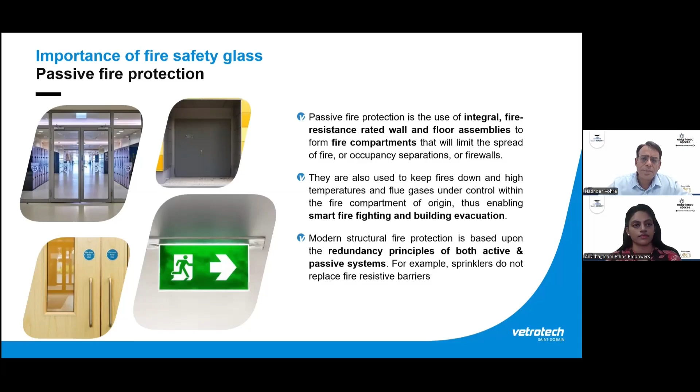When we talk about fire protection using glass as a medium, yes, fire rated glasses are of different types. Certain glasses withstand fire and don't break when exposed to extreme heat during a building fire, but they allow heat transfer. Then there are certain types of glasses which don't break in case of fire and also limit the heat. Further, there's one more category of fire rated products which really limit the heat and give complete insulation, as if it is a brick wall.

With technology and advancements, a lot of products are being developed, and a lot of innovation and R&D is going into place, which will really help in future for architects or designers to use such products in their buildings and provide an easy egress to the occupants.

More importantly, when we use fire rated glazed solutions, which have glass in them, glass gives you transparency and visual benefits. It can be combined with any multifunctionality, and suppose we are able to see the fire and detect it, then definitely we can cut down that fire in the initial stage.

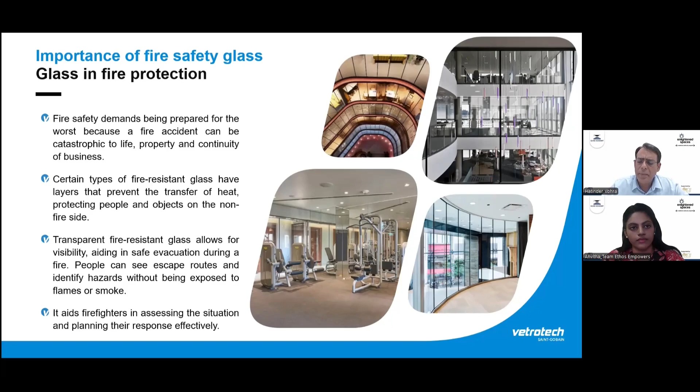More importantly, these fire rated glass solutions really help or aid the firefighters, because these are the people who actually enter the building when the fire is at a very advanced stage. So for them it is important to understand where the fire is, where the seat of the fire is, and such products will also help them to reach the seat of the fire.

So before we go into fire rated glass, I would just take you a few minutes to make you understand how glass is made.

Glass has a couple of components, the major component being silica sand, which forms 60% composition of that glass raw material. Then we have soda ash, dolomite, calcite, and cullet. Cullets are nothing but broken glass pieces which are again used while manufacturing glasses. Why is cullet used? Because these cullets really help to melt the whole batch of raw material faster. That is why these cullets are used as part of that particular batch.

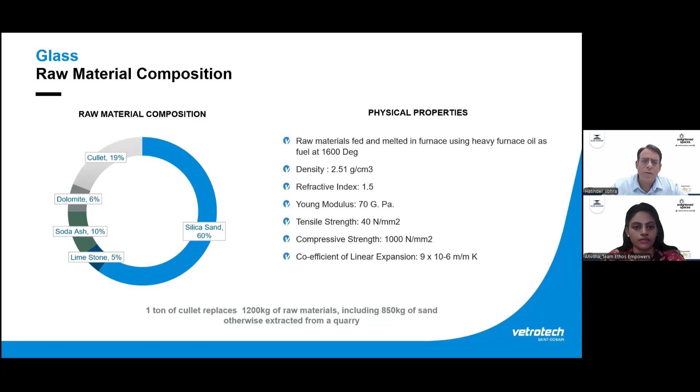Then it goes to QC, where automatic laser detection is there, and cutting will happen. Then packing and transportation will happen. So this is the basic model of how glass is made.

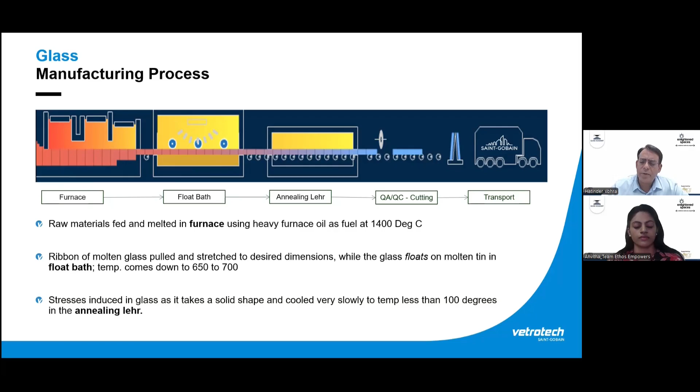Now, when it comes to fire rated glass, yes, for certain fire rated glasses the raw material composition is slightly different. We will sometimes add alkaline earth metals so that we increase the melting point of the glass. In the float bath, the temperature of the glass will normally go up to 600 to 650 to 700 degrees Celsius, whereas when we add alkaline earth metals, or it could be a borosilicate glass, it can go up to a higher temperature, even 900 plus degrees Celsius. So this is how the different types of fire rated glasses are made.

Coming to the performance of glasses under fire, this is a very important slide, because we need to know which type of glass will perform in case of fire. When it comes to annealed glass, the normal float glass which we call annealed glass, it will break if exposed to fire within less than a minute. So it is not a fire rated glass.

Wired glass, though it was where fire rated glass itself started, I would say it started with wired glass, but eventually these wired glasses have been phased out due to their drawbacks, and people getting hurt due to the wire mesh. But these can take a temperature up to 30 to 60 minutes only, and that too in very limited size, not larger panes, when it comes to fire rating.

The third category is tempered glass, which is glass that is heated again once it is made, and then made stronger. These tempered glasses, when exposed to fire, will also break within less than 5 minutes, 4 to 5 minutes. They will immediately break. Then there is laminated glass, which is glass laminated with polyvinyl butyral, called PVB layers.

And then PVB being a combustible material, this will actually further add on to fire, and these glasses also break very fast. When it comes to double glazing, normal double glazing, I'm talking about ordinary double glazing with ordinary glasses, not fire rated glasses, this will also break within less than 5 minutes.

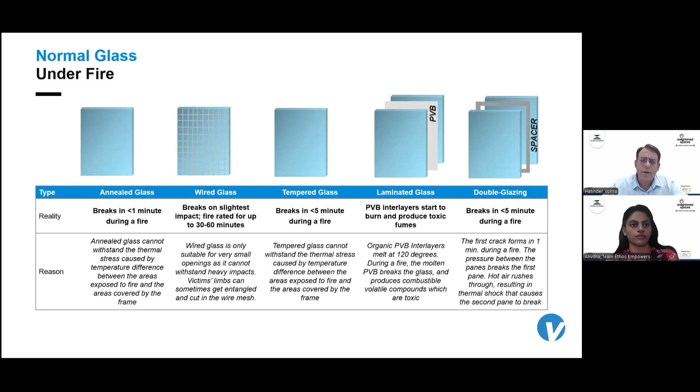So why do these breakages happen in all these glasses? This is because due to delta T, the temperature differential, the basic structure of these glasses is such that they are not able to withstand that heat, and they break. Unlike the fire rated glasses, which can attain higher temperatures and don't break till the time frame it is being tested. Let's say it is tested for 1 hour or 2 hours, it will withstand fire or that heat for that duration.

So when coming to the category of fire rated glasses, I'll cover the classification in coming slides. The monolithic glass, as I discussed, will not break, but it will definitely transfer heat. It will withstand that fire for 30, 60 or 120 minutes, but it will transfer the heat immediately to the other side, because when there is a fire in a building, the temperature will go up to 600 degrees Celsius within 10 minutes. So on the fire side, if we have 600 degrees Celsius, the non-fire side will eventually go to 400 plus, 500 plus within a very short period of time, again within less than 10 minutes. That means I cannot cross that area, because I will die if that side is even more than 100 degrees Celsius.

Then comes the other category of glass, the intumescent interlayered category. In this, you have two glasses with a gel in between, which could be a patented compound for different companies. What happens to this interlayered gel? The interlayer is basically a compound which will foam up in case it is exposed to fire. Any side could be the fire side - these are bidirectional glasses.

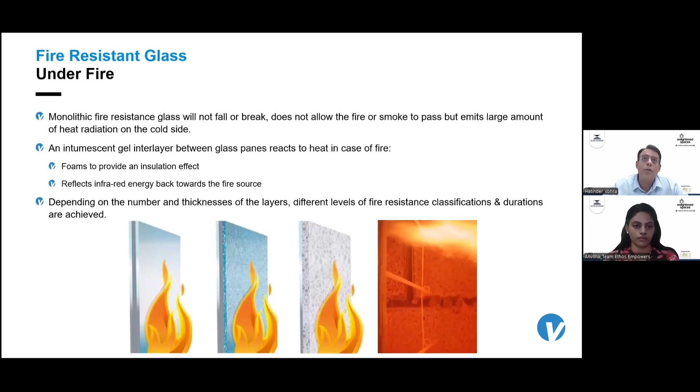That means if there is a fire in a building, and let's say it takes 10-15 minutes to evacuate that building, at least for the initial time frame, depending on which category of product we are using, the heat will not transfer, and I can easily cross to the non-fire side without feeling any heat - the other side could be even 1000 degrees Celsius.

So I'll just run a short video to give you a brief idea of how we test these glasses.

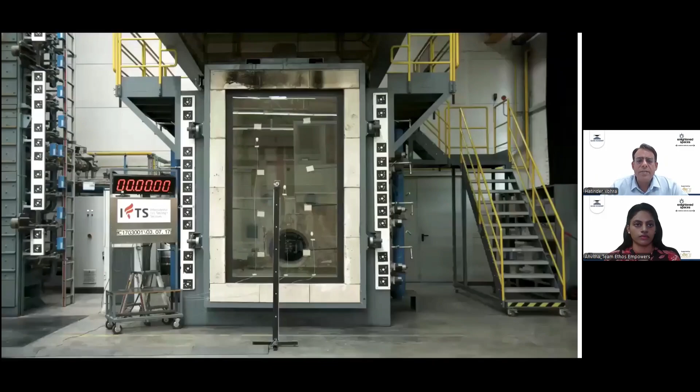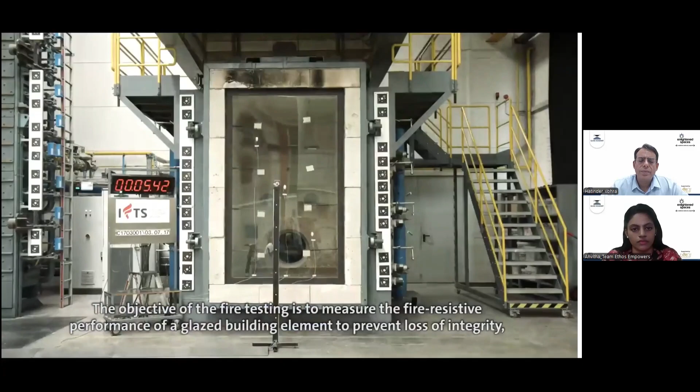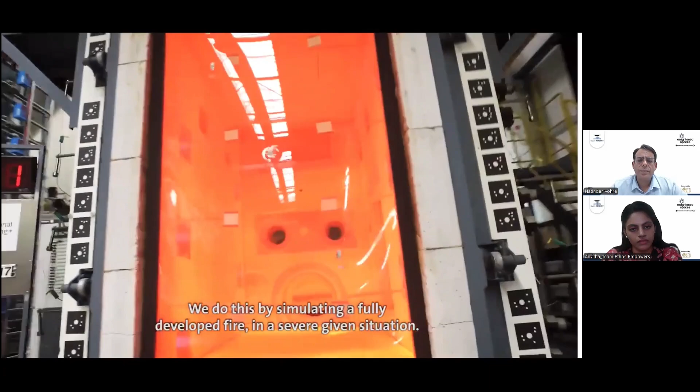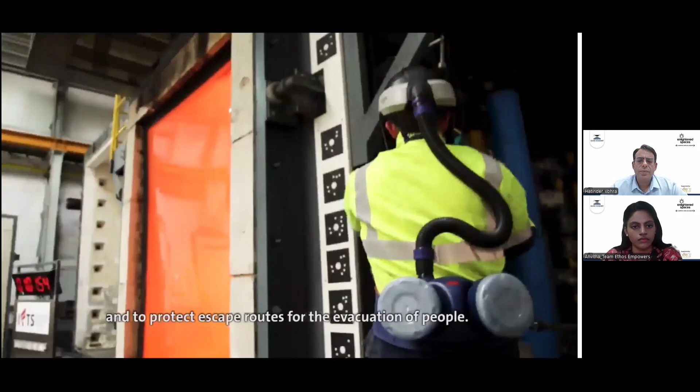Welcome to the world of fire testing. In this short clip, we would like to introduce you to fire resistance testing of glazed building elements. The objective of the fire testing is to measure the fire resistive performance of a glazed building element to prevent loss of integrity, to limit heat transmission or temperature rise, which might cause the spread of fire. We do this by simulating a fully developed fire in a severe given situation. These fire-resistant elements are mainly used for fire compartmentation, limiting the spread of fire to other rooms and to protect escape routes for the evacuation of people.

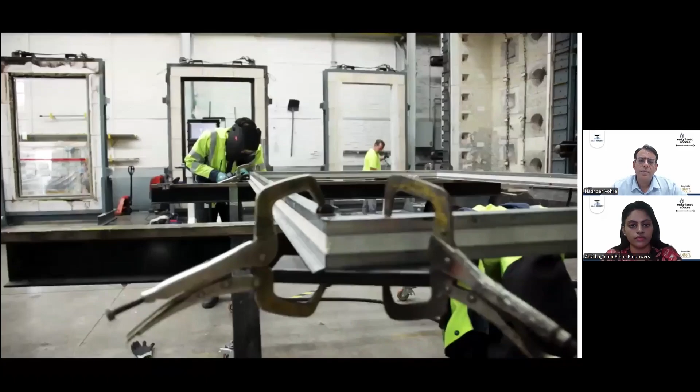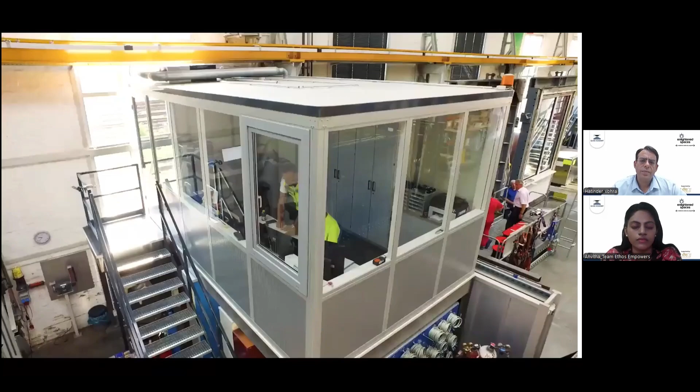In the test, the furnace simulates a room fire after flashover, when air temperature rapidly rises. The flashover point is the moment of near simultaneous ignition of most of the directly exposed combustible materials. The fire-resistant glazed building element is installed in front of the furnace. During the test, measurements are taken and observations are made on the opposite side of the fire. Fire resistance tests are conducted according to standardized test methods that outline in detail how the test must be conducted and which criteria need to be fulfilled.

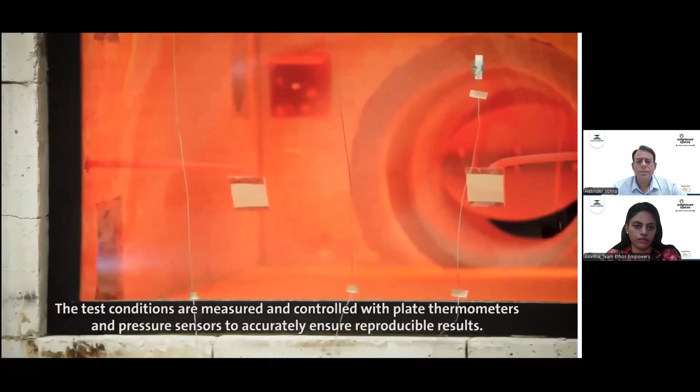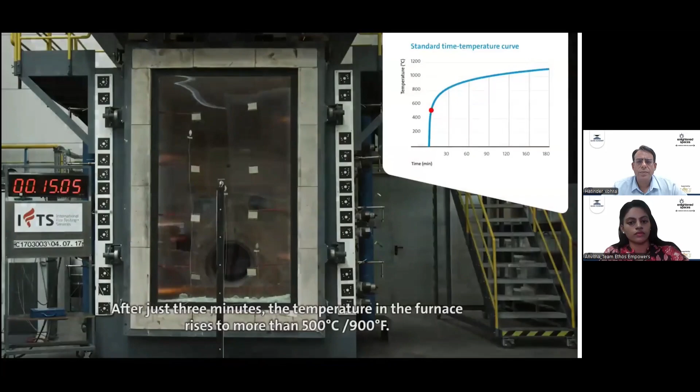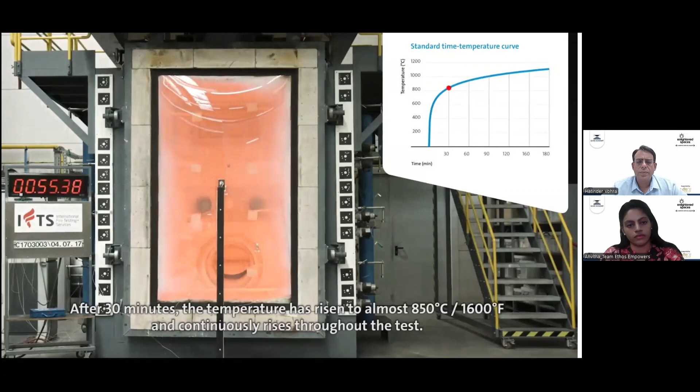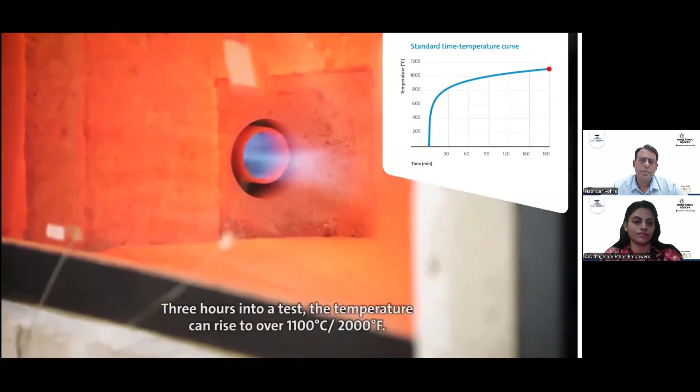Most of these test standards follow the standard time temperature curve according to ISO 834. The test conditions are measured and controlled with plate thermometers and pressure sensors to accurately ensure reproducible results. After just 3 minutes, the temperature in the furnace rises to more than 500 degrees Celsius, which is 900 degrees Fahrenheit. After 30 minutes, the temperature has risen to almost 850 degrees Celsius, which is 1,600 degrees Fahrenheit, and continuously rises throughout the test. 3 hours into a test, the temperature can rise to over 1,100 degrees Celsius, which is 2,000 degrees Fahrenheit.

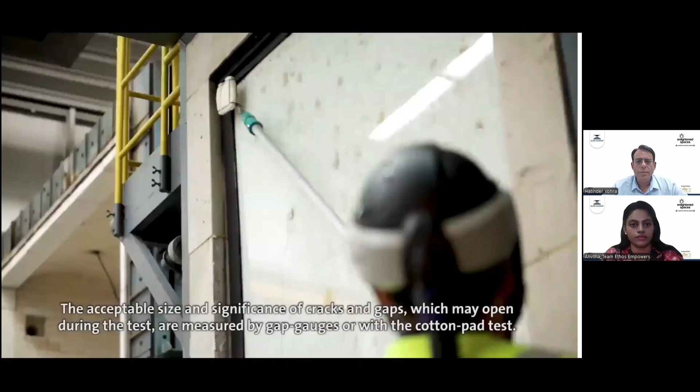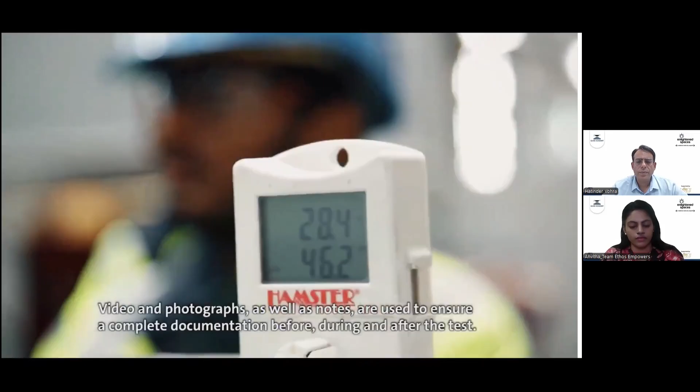On the opposite side of the fire, temperatures are measured with thermocouples placed on glass and framing surfaces. The radiated heat of the tested element is measured with a radiometer. The acceptable size and significance of cracks and gaps which may open during the test are measured by gap gauges or with the cotton pad test. Video and photographs as well as notes are used to ensure complete documentation before, during and after the test. After the building element has proven its performance over the intended time, the test is stopped in a safe and controlled manner.

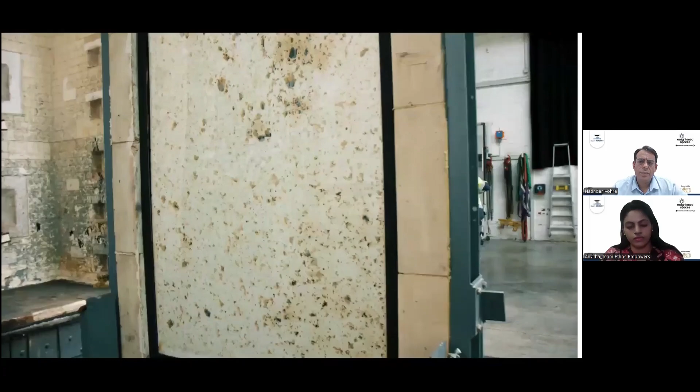Once the element has cooled down, it can be further analyzed. Building elements that successfully pass the test and for which a report is issued are eligible for classification according to the relevant building regulation or local requirements.

So as you can see, these testings are very important, and more important are the labs where we do the testing, because all these labs should be accredited labs. That means they are fully calibrated, they are certified, and from there we get the certification, which is called a third-party certification, and only based on these certifications we are able to offer the solutions to the customers.

So coming to fire safety types, this is important, which we discussed initially. The first type is called integrity type. It is denoted by E, and it means that the particular glass or a particular material will remain stable in fire. It will not fall, it will not break for that much time frame, could be 30, 60, 120 minutes, but heat will transfer.

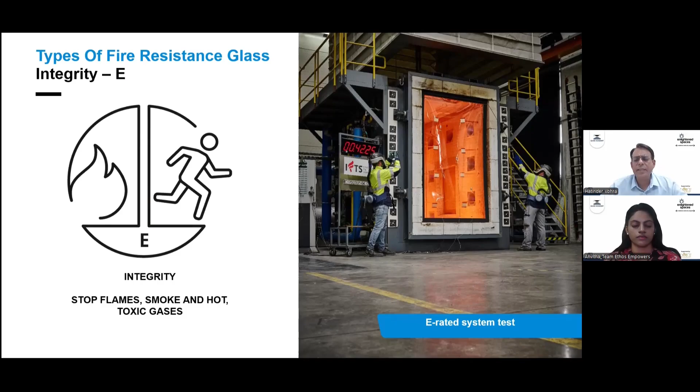So this is the basic category of fire rated glasses, and generally we recommend these glasses only where we see in the design of a building that there is an area where people are not going to egress, because if heat transfers, then it limits the egress of the occupants. So it has a restricted usage in a building.

Coming to the EW category of products, this is the most widely used category in India, in Europe, in the Middle East, or even in Southeast Asia. Why is this category important? Because this category is a midway category between E and EI. The EW category limits the radiation as per the standard to 15 kilowatts, but of course 15 kilowatts is a very high value.

But what happens is that initially, for 20 or 30 minutes, the radiation is even less than 1 kilowatt. And even for approximately 45 minutes, radiation is close to 1.2 kilowatts. That means I can stand very close to the specimen, while the other side could be even 1100 degrees Celsius, without feeling heat. So in case of fire, I can easily cross that area if I'm evacuating a building. That is why this EW category is very important, because it provides easy egress to the occupants. It limits the radiation and provides insulation also for a particular time frame.

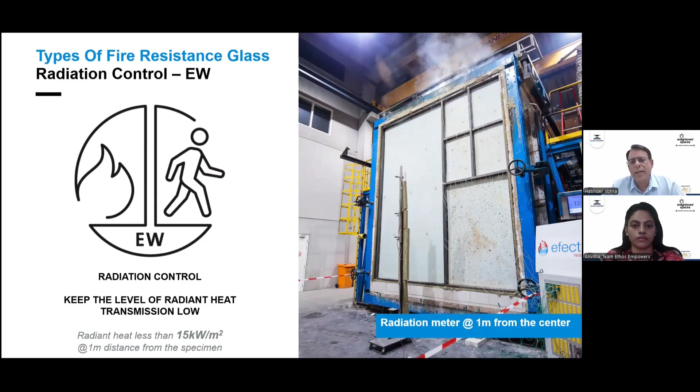And these radiations are measured. As you can see, there is a radiation meter at the center of the specimen. This is kept at 1 meter distance only. It is not kept at more than 1 meter because the heat dissipation is very high. So that is why it is kept at a distance of 1 meter as per the standard.

Then coming to the third category, which is technically one of the best categories, called the EI category. This means integrity with insulation. Integrity with insulation means that you have thermocouples on the non-fire side, and the maximum temperature on the thermocouple should not be more than 180 degrees Celsius.

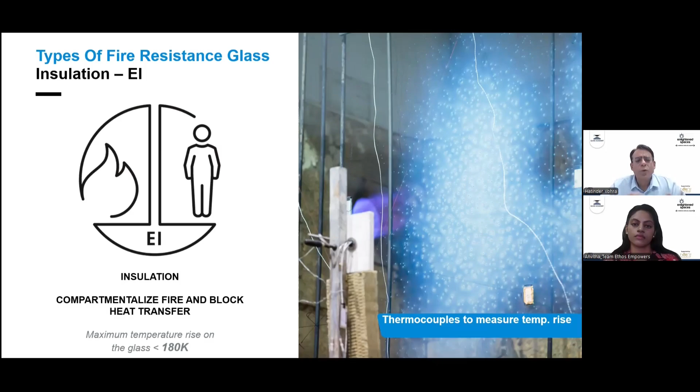So when we say it should not be more than 180 degrees Celsius, it means that the heat is much less than 1 kilowatt. The other side could be 1000 plus degrees Celsius, but I will not feel any heat on the non-fire side. So it is as good as a transparent wall. This EI category could be EI 30, EI 60 or EI 120.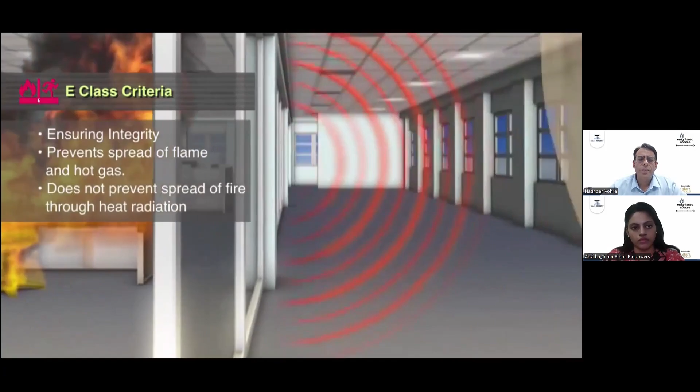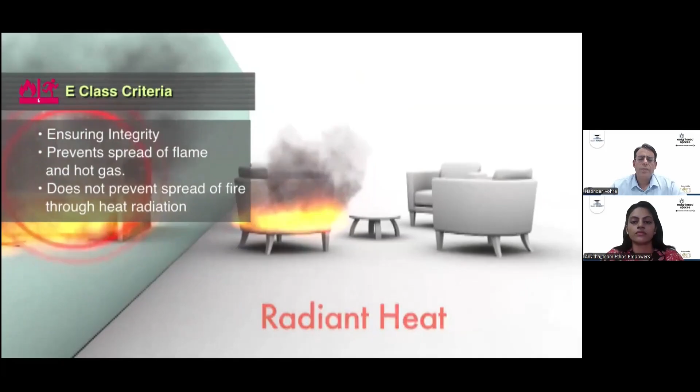When it comes to fire safety, there is no second chance. This video will showcase the comparison between two kinds of fire-resistant safety glass through a live demo. Integrity E-rated glass stops the fire and remains intact for the time frame of its fire resistance period. The intense heat transmitted to the non-fire side may result in spontaneous combustion of objects, and it could impede the safe passage of the occupants.

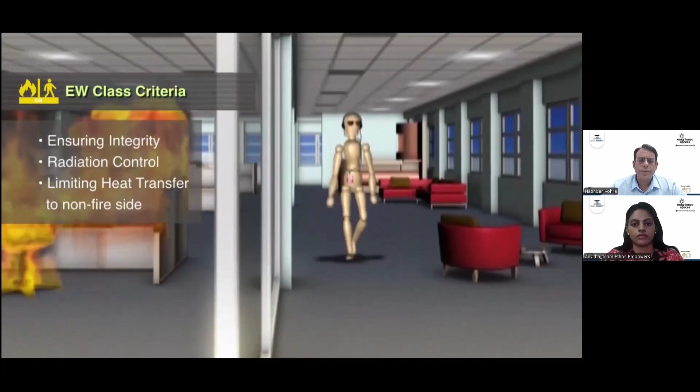EW rated glass keeps its integrity during the event of fire and also controls radiant heat transfer to the non-fire side during its resistance period. The benefit of using an EW rated glass will be demonstrated through a simple experiment at the World Glass Complex of Saint-Gobain at Sriperumbudur, Chennai.

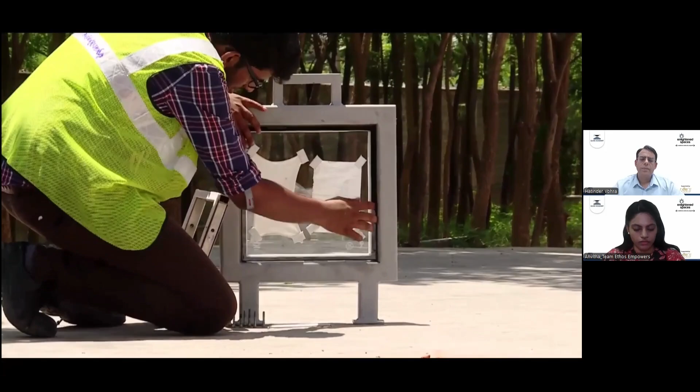On the left is a highly toughened monolithic integrity E-rated glass. On the right is an EW rated glass including an intumescent interlayer between two toughened glass panes. A piece of cloth and paper are stuck on both the glass panes fitted into a frame. They simulate objects on the non-fire side in the event of a fire. What do you think will happen to them?

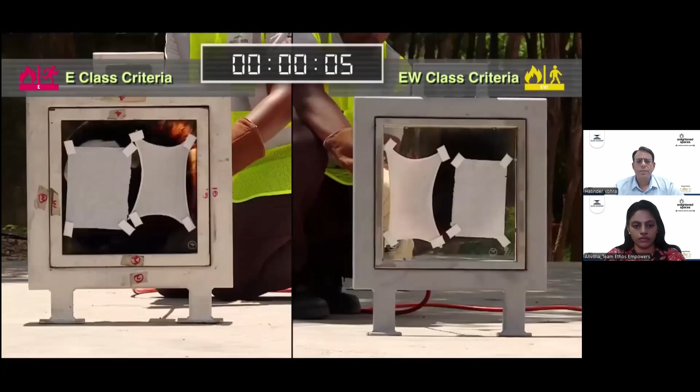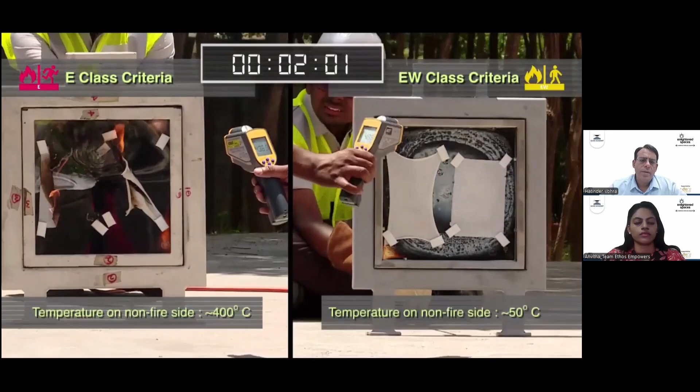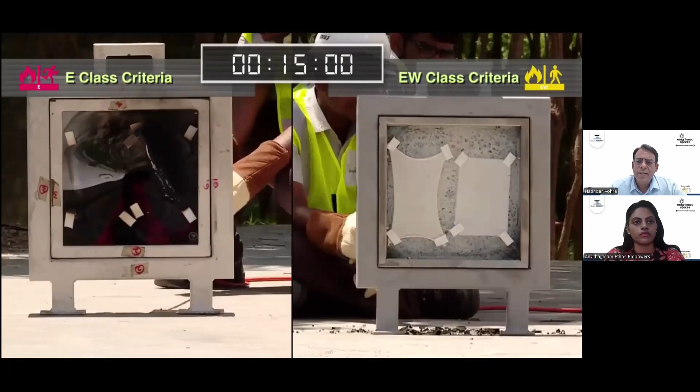On the left side, the paper has burnt due to heat transfer. Whereas on the EW side, it is intact, and we can even touch that side immediately. The other side is still...

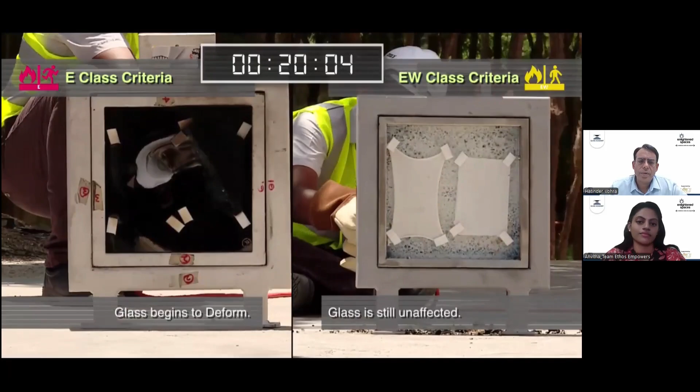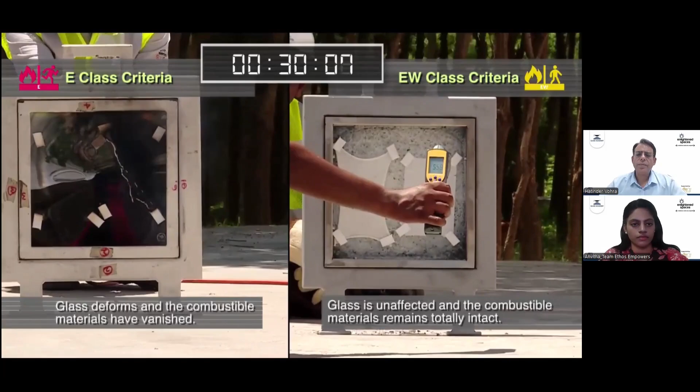The items stuck on EW rated glass remain totally intact, whereas the combustible materials on the E-rated glass have vanished completely. Knowing the right choice of glass is the first step towards safety. Choose wisely.

So now coming to the applications with respect to the National Building Code. What our National Building Code says, as on date, is that the fire exits and the doors in the building should have integrity, stability, and insulation for 20 minutes. That means with this criteria of insulation for 20 minutes, you are providing easy egress to the occupants of the building.

This insulation criteria is going to increase to 30 minutes in the revision going forward, which is a very good thing. That means when there is a fire, the occupants of the building will have an easy egress. They can cross that area, go down and escape the building very easily, because there will not be any heat transfer.

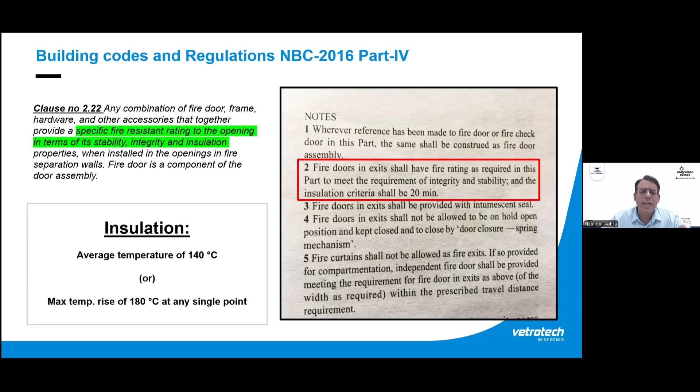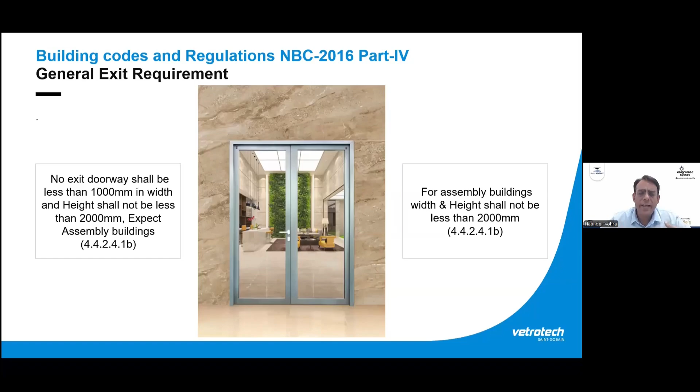And this follows in the critical areas. It could be lift lobbies or other critical areas like AHU rooms and electrical rooms, where you really want to compartmentalize fire, and your doors are actually insulated. For the exit door areas and exit requirements, it also says that they should be 2 hour fire rated, and it also gives the dimension of the door. It should not be less than 2000 mm, so that in case there are a lot of occupants, there is an easy passage for people to move out of the building.

This is a very common design which we see on the screen right now. The lift lobbies are to be compartmentalized. Lift lobbies are to be compartmentalized and pressurized because in case there is a fire, there is a possibility the fire will go up, create a funnel effect, and eventually spread to a greater extent.

So that is why, in case the lift lobbies are part of the building, in the core of the building, they should be compartmentalized. And generally we see the occupants or the customers would like to have glass because they want aesthetics, they want visibility, and they generally go with EW category of products.

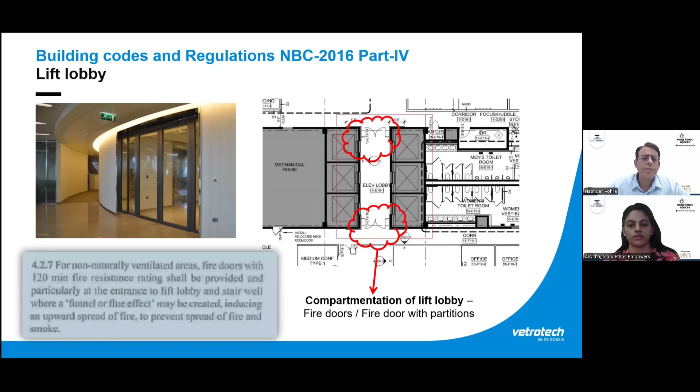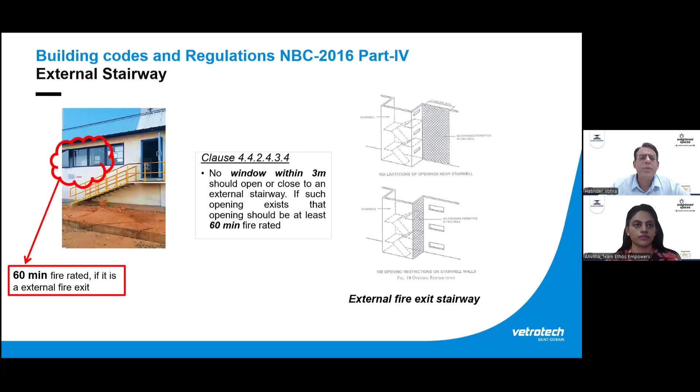This is one more application: as per the National Building Code, if you have a staircase and you have windows which are close to the exit staircases, if they are within 3 meters, then they should be 60 minutes fire rated. This is because if there is a fire and people are crossing that staircase, the heat should not transfer to the people who are exiting the building. So that is why this area is also shown as fire rated.

Refuge area forms a very important part of the building, especially high-rise buildings. The height at which there should be a refuge area is also defined, like 24 meters and every 15 meters, for different categories of buildings.

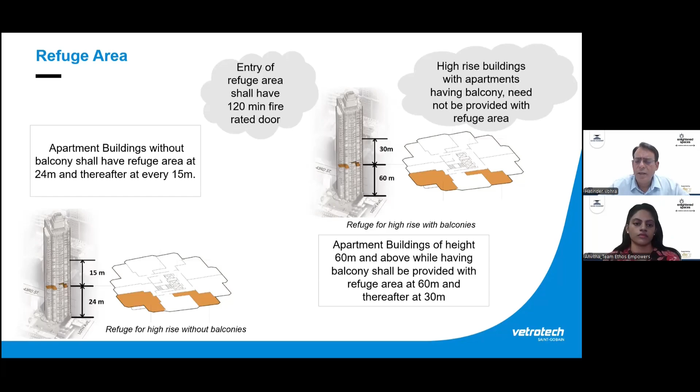What a refuge area does: suppose the refuge area is at the 7th floor and there is a fire at the 6th floor, then people will immediately move to the refuge area and stand there, so that they are later evacuated from it, because that refuge area acts as a refuge where they could be safeguarded. This is a very common practice in India, and almost all high-rise buildings are mandated to have a refuge area in their design.

When coming down to residential buildings, all the exit doorways are very important, and in residential we see there are basements. All these basement car parkings should be fire rated. The doors should actually be fire rated with insulation, EW category, because those areas are very vulnerable. If there is a fire in the car parking, the cars will catch fire and the heat will transfer. So we really have to limit that heat and compartmentalize that area. So it is very important to have that.

And all these exit doors should have a panic bar, because it becomes very easy for the occupants. If they are running, they just push the panic bar and the door opens. Specifically, when it comes to hotel kitchen areas, the fire separation between the kitchen and the serving area, which we generally see in a lot of hotel kitchens, is a glass. So that glass should be fire rated, because suppose there is a fire on that side, it should not spread towards the guest area.

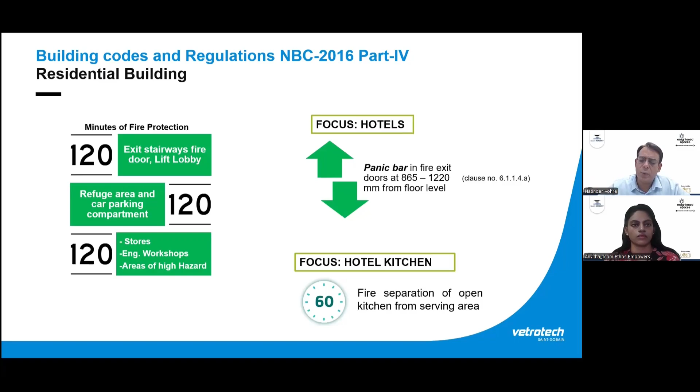Then there are commercial buildings. In commercial buildings, the key areas which should be fire rated are exit doors, lift lobbies, refuge areas, car parkings, and suppose there is an office which has data server rooms. These server rooms are also compartmentalized properly with fire rated material, I would say. And if there are doors, they should also be fire rated.

Public buildings, specifically transport like metros, these areas are quite vulnerable because the human traffic is very high. A lot of people use this medium to travel from one location to another. So in the National Building Code, there is a provision. It is very clearly demarcated which areas should be fire rated, like exit doors, kiosks, lift lobbies.

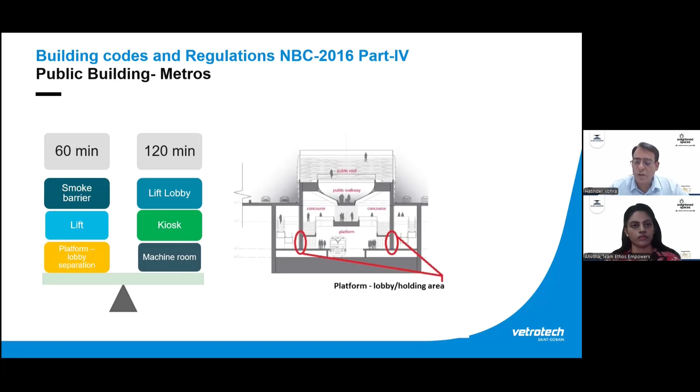Especially when it comes to underground metro stations, there are smoke barriers which are top hung, and these smoke barriers should also be used because they really channelize the smoke, and then there are suction fans which will extract the smoke out of the stations. Because most of the time we have seen when there is fire in a building, people die just because of smoke. So it is very important in those areas also.

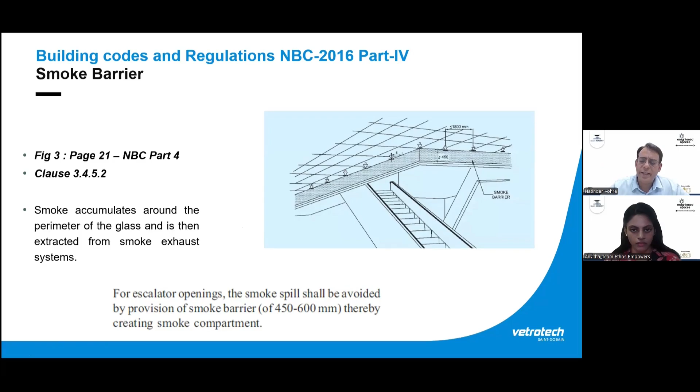Here, as you can see in the slide, you see these smoke barriers. They are top hung, and they will channelize the smoke, and then this smoke is extracted from this side. This is very widely and commonly used nowadays in India. In a lot of underground metro stations, when you come through the escalators, you will see these smoke barrier systems are widely installed across India.

And there is a specific standard for smoke barrier systems under which they are tested, and they can actually withstand heat up to 600 degrees Celsius. Why? Because when there is a fire, the tendency of smoke is to rise up, and this smoke itself is very hot. The standard says that this smoke can be as hot as 250 degrees Celsius. That is how they are tested.

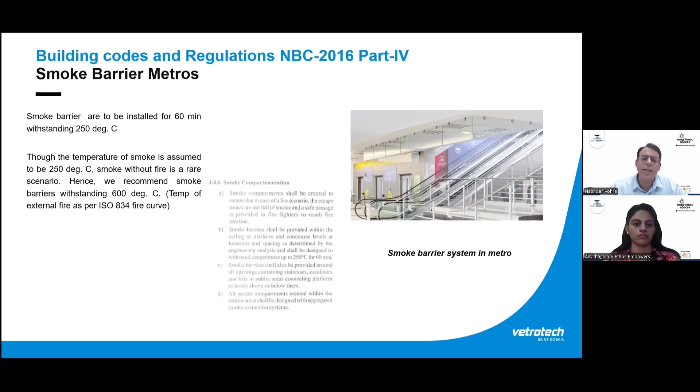So coming to the benefits of glass as such, I would say glass is a transparent material. It allows light. Nowadays we have solar control glasses. There are different types of glasses, offline or online coated glasses, which restrict solar radiation. This really reduces the AC tonnage of a building, because less heat is coming inside, and gives a better U value. So glass can provide all these features, and more importantly glass is a lighter material, so it puts less load on the building, and you can construct your facade at a much faster pace.

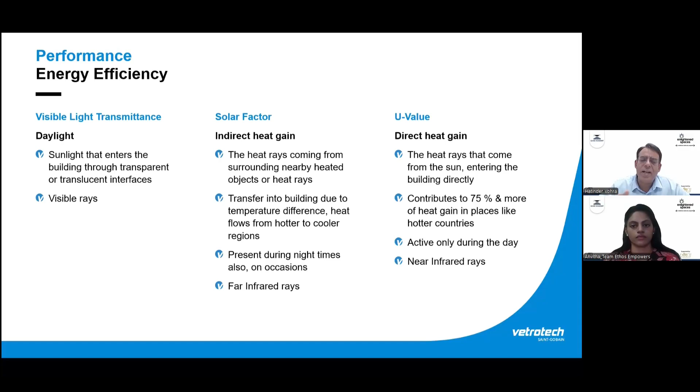Coming to light transmission and solar heat radiation, when it comes to light transmission, or more importantly natural light, because we really want to avoid usage of artificial lighting, glass will really give you more daylight inside.

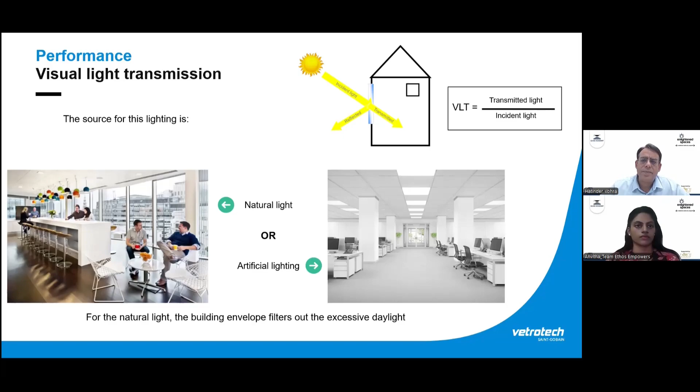U value is also one of the aspects which is very important. If buildings are going for any LEED or GRIHA rating, there is a specific U value which should be met, because U value is the amount of heat transferred due to temperature difference from inside to outside per square meter area of glass.

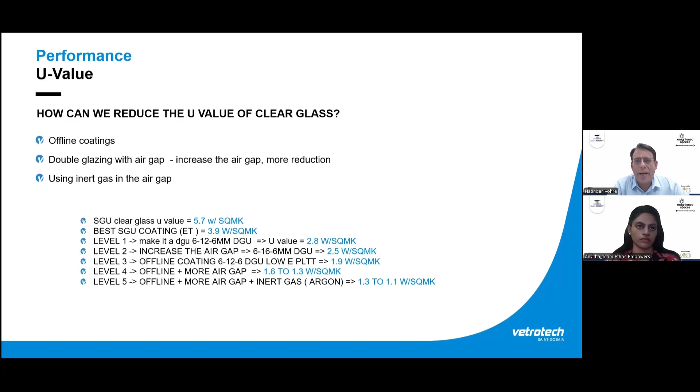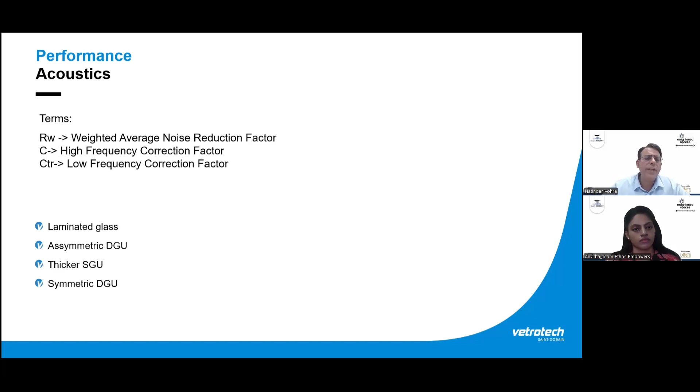Very important, these fire rated glasses really give you acoustic benefit, because let's say there is a partition and you have to use a fire rated material there, and if it is glass, specifically these interlayered glasses, they give a very good acoustic benefit. They give Rw close to 38 decibels, and it can go higher based on different combinations. So we really have an acoustic advantage when we use these fire rated glasses.

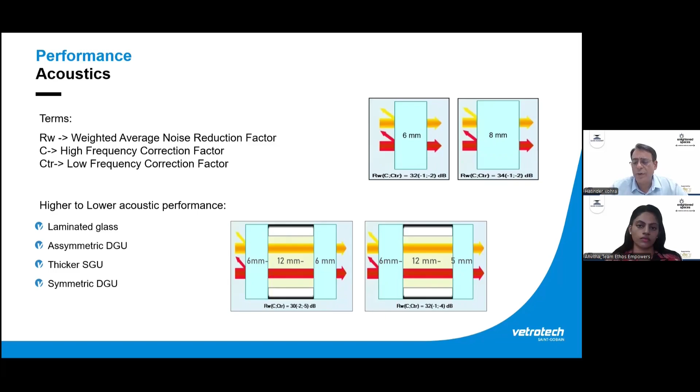As you can see here, different glasses will have different RW factors. Like single monolithic glass will have 32, 8mm will have 34. When we make DGU, it becomes 32. But in case of fire rated and all, it will further go up to 38 decibels.

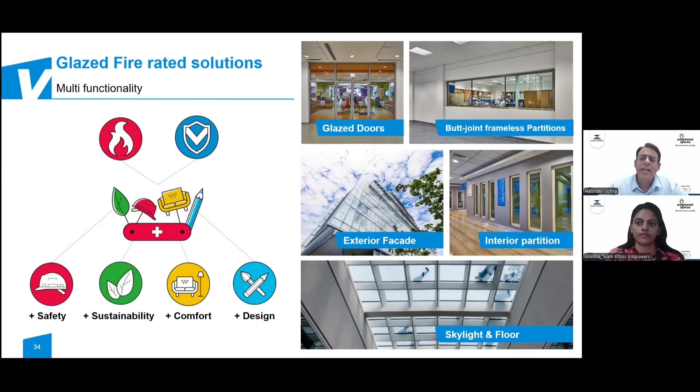Talking about... they really give you safety, sustainability, comfort, and design. There are different design parameters where we can use fire rated glass. And very important is that when we say fire rated glass, it always goes into the system, which will be covered maybe in the next part of the session. But the whole system has to be tested properly and then only used in the building.

So when you are using a fire rated glass, I would really emphasize that for any product from any manufacturer, these are a couple of factors which are very important to choose a product. Ask your supplier whether these glasses are UV stable, because when we use interlayered glasses, if these products are not UV stable, with time you will find that there is bubble formation and haziness in the product. So UV stability is very important.

Are there enough references? What about the manufacturer warranty and impact strength? Because most importantly, when these interlayered glasses are used, all these products should have impact safety. That means these are toughened fire rated glasses. Suppose there is no fire and then there is impact on the glass, it should not break easily. So that is very important.

And are they manufactured in a proper audited facility, that is, audited by a third party? Because this really gives comfort to the customer that whatever product they are buying is the right product, which has been certified, tested, and audited by a third party.